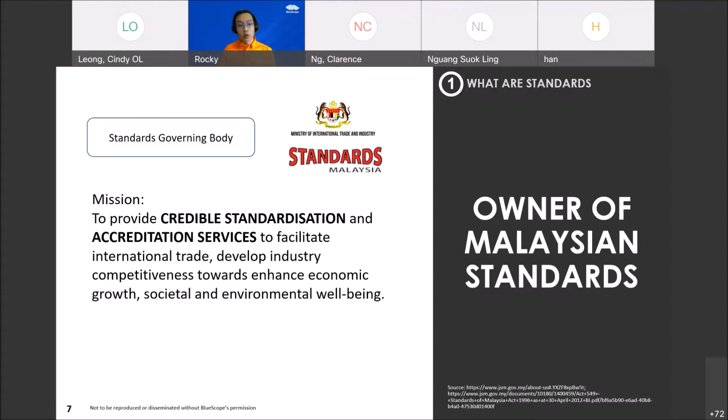So in essence, as the name suggests, it's a standard where everyone speaks the same language, right? Where the products produced across different regions are complying to a known standard. Okay, so as there's the owner of the standards, there will also be users of the standard. So the primary users of the standards will be certification bodies, right? Who use it to certify or even conduct testing.

Okay, so how it affects producers or manufacturers like us is that once we produce the product, we have to have a certain internal guideline ourselves. So it will be very convenient, or for established ones, it will be following or complying at least to the established standards that are recognized. So those products or processes will be certified by an accredited certification body like SIRIM.

And SIRIM would have already been accredited by the government agency or any body within each country to say that they are able to provide such certifications or testing services, right? So they are competent to do so. So those are different levels of how a standard is used. So if it's being accredited, then it's being accredited to a different type of services as well.

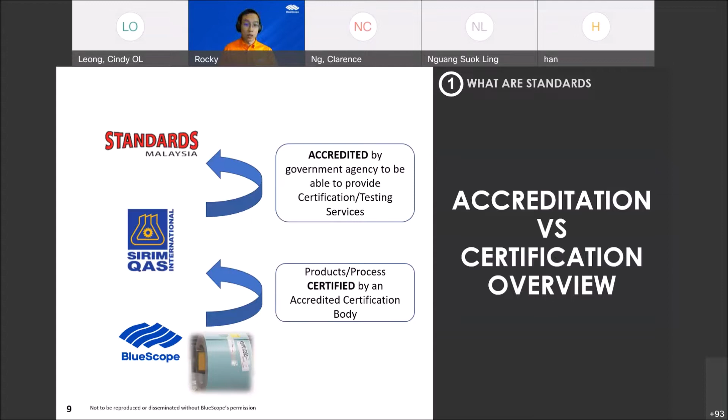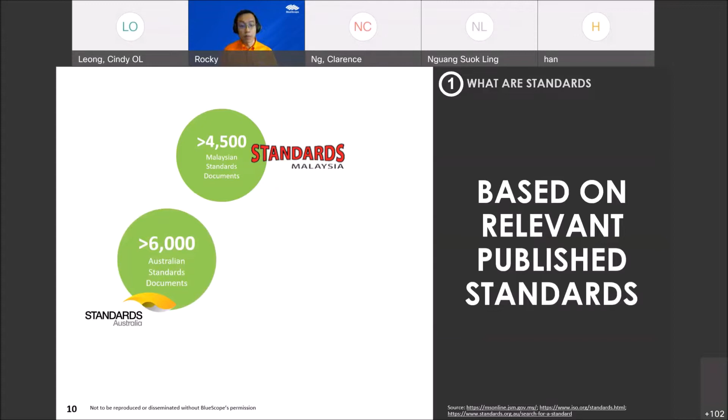Okay, so in Malaysia, as I mentioned, there are Malaysian standards, and statistically based on the website, there are more than 4,500 Malaysian standards. Compared to other countries, for example Australia, they have more than 6,000 Australian standards developed, so it could be covering more scopes. And one of the biggest or most common ones will be ISO, which is an international standard. Based on the stats, they have published more than 22,700 valid standards.

And you might imagine, so many standards, how do you actually catch up with all that? So there are ways where you can actually search for those standards and make sure that you get updated when the standard itself gets revised or gets taken down to be replaced with other standards. So there are subscription services for that.

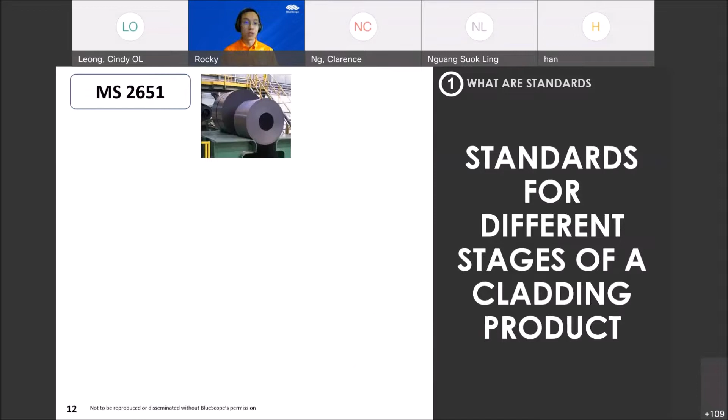Okay, so to be more specific for the steel industry or cladding industry, relevant to us, it starts from the raw material, and the raw material itself needs to be complying or certified to a standard. That standard reference is MS2651. Then when it comes to our production, where we produce a specific type of metallic coated steel, it needs to comply to MS1196. Of course, there are different types of metallic coating out there.

So today I will not be sharing that here, but you can actually find that online. All right, the reference documents will be slightly different from MS1196.

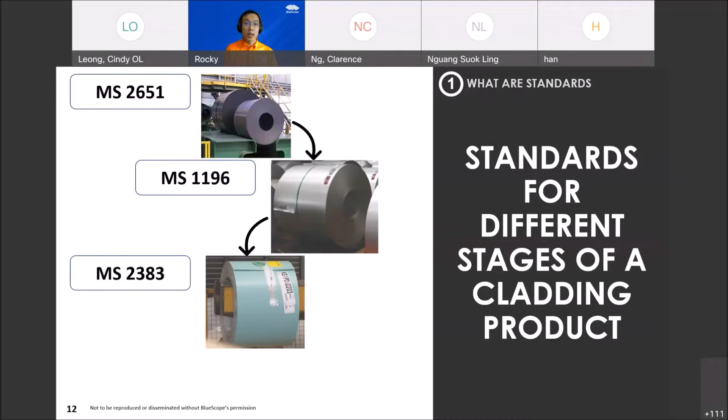So from there, moving on to, let's say, a painted product or pre-painted coated steel, then the reference is MS2383. Of course, in recent years, there is also usage of MS2500, which is a standard that controls the quality of the profile sheets, which today I will not be talking about. So the extensive part will be in the middle, MS1196 and MS2383. Okay.

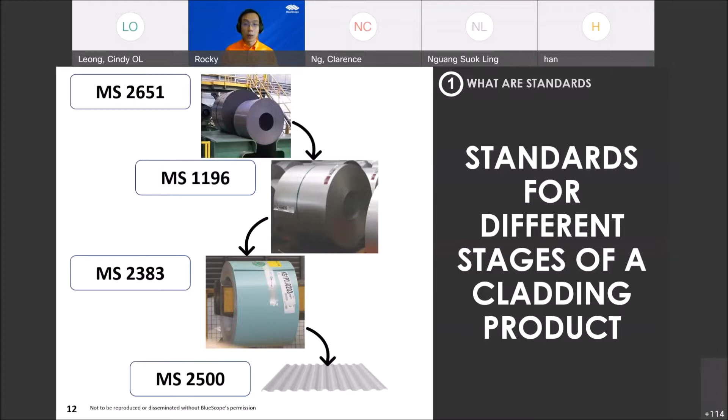So in every single document, normally how we start is by looking at the table of contents. And the first thing that pops up is the scope of each standard. It's really important for you to understand the scope, because sometimes the scope itself will tell you a lot about whether you should proceed with reading all the other details, because most often the title itself cannot explain everything. So you need to go down in detail, for example, MS2383, to look at how this standard will be used.

So over here, MS2383, for example, is used to specify the performance requirements of what they call continuously organic coated or laminated flat steel. That is a very technical term for painted or pre-painted product. And it also specifies it's for construction or finishing of buildings usage. And of course, there are other notes which I will highlight later on.

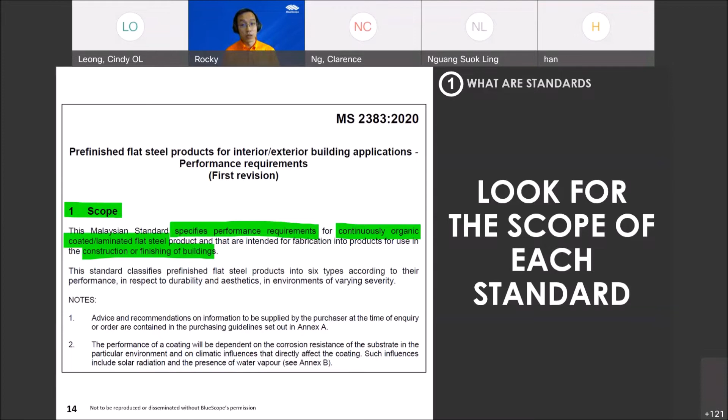So how is it important? That is basically what a standard is for: for producers to produce according to that standard, and also for accredited bodies to certify those producers, and essentially have the same language, so that people can recognize it.

And most often, I'm sure some of you in the audience might have asked for a SIRIM cert. So that is what a SIRIM cert entails. For SIRIM certs, you need to be more specific sometimes in terms of what kind of product you are asking for the SIRIM cert for, and you need to specify the product brand, perhaps, because most often the certificate itself also covers what brand is being certified.

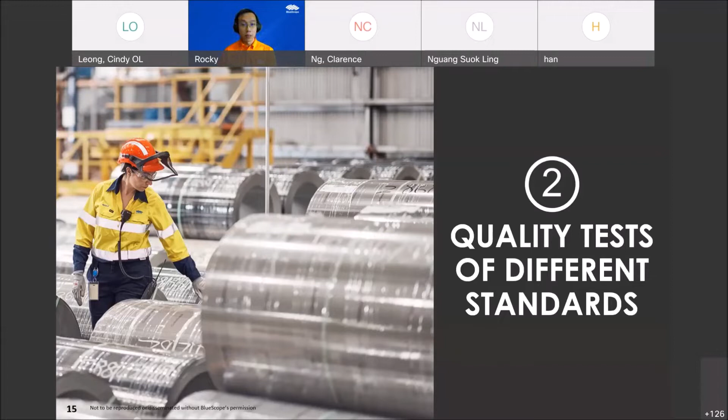Okay, so moving on to the second part, which is about the quality tests of different standards. Under the standards, most often there are testing standards, but there are also standards that specify the requirements when you do production. So that is what quality tests are for. Under these standards, of course, when we say metallic coated steel, just now I mentioned MS1196.

Of course, there are other national standards that are also published and being used as well, because in Malaysia we have producers that might be based in other countries or producing from other countries, and they import. So the way to look at it is that each producer will follow perhaps their national standards when they produce. But if they import into Malaysia, it needs to follow the import regulations. So the different government agencies will specify what standard you need to certify your product to before you can import it into Malaysia.

So most commonly, most intuitively, the Malaysian standard will definitely be used. But of course, some other products might not have a dedicated Malaysian standard. That's why for some products they might take the Japanese standard, the Australian standard, for example, or the American standard. So these are the list of standards that I will be briefly talking about.

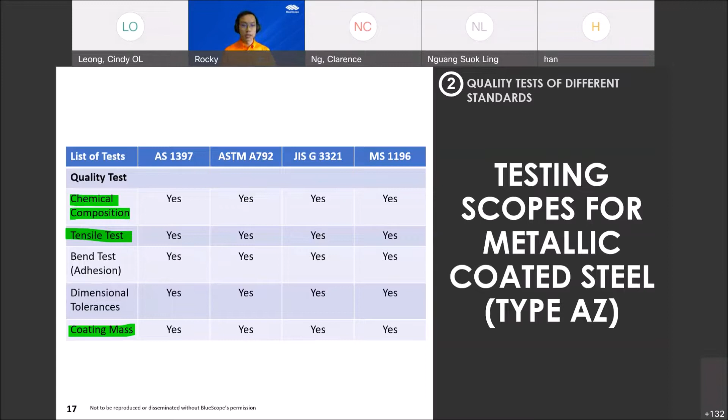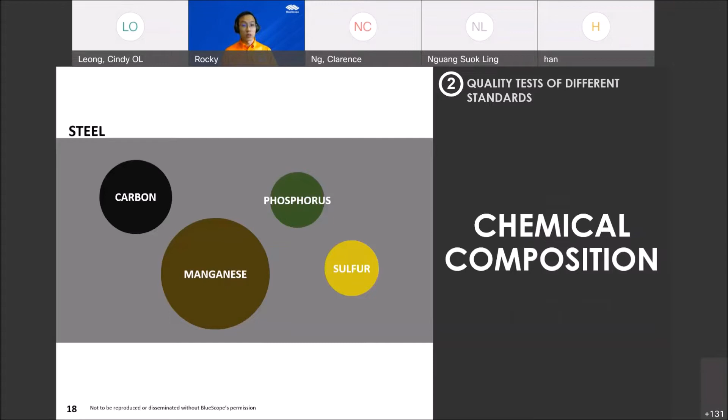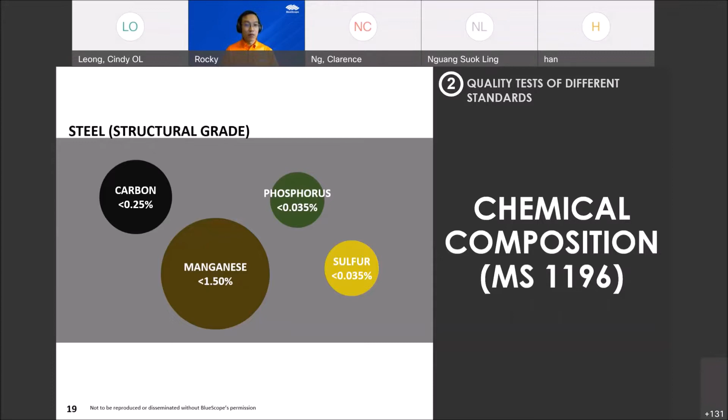Chemical composition talks about the steel base: what is the composition of carbon, manganese, phosphorus, and also sulfur in that steel? And of course in MS1196, the percentage cannot exceed the numbers showing on the screen. But if you compare across different national standards like American standards, Australian standards, and Japanese standards, the maximum allowable chemical composition for these four components is different.

Okay, so how it affects you is that it depends on the steel that you source from, right? If, let's say, the steel producer is not aware of this and produces something with a chemical composition that exceeds some of these numbers, then it will not be complying to this standard, right? Of course, this chemical composition will have its own background story why it's set that way, because it will determine a lot of the mechanical properties or material properties of the steel itself.

So I won't go into the reason why, okay? But just bear in mind, the first thing of the steel base is that the chemical composition itself needs to comply to all these maximum limits. All right. So the next one is about tensile test. Tensile test tests for what is the strength of this steel when it's used for, say, cladding. In the market there are actually various different grades of steel that are meant for different applications.

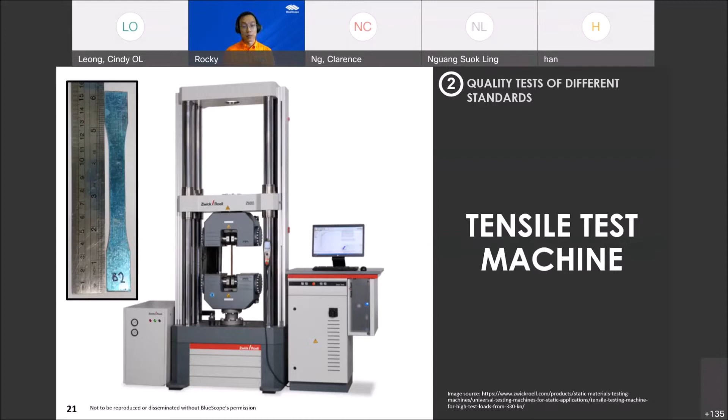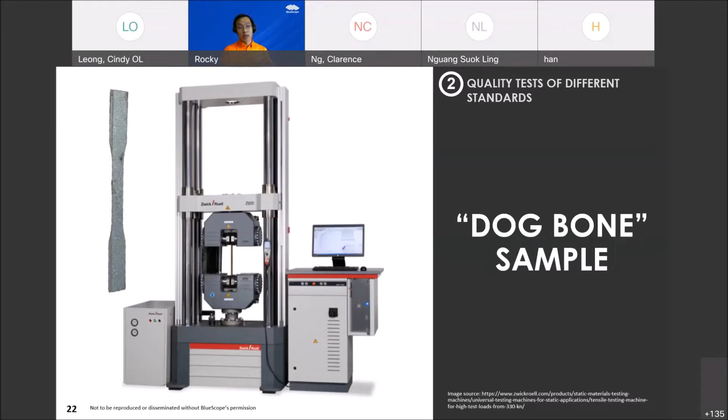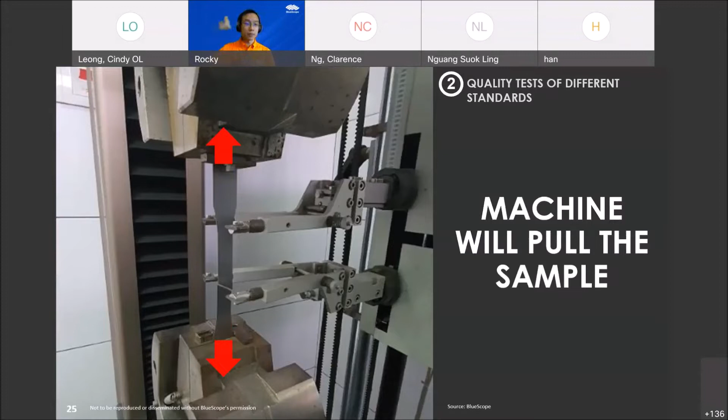Of course, in the manufacturer, even in our factory itself, we have a dedicated tensile test machine. This is how it looks like. Every production will actually take a sample. The sample itself is what we call a dog bone sample, and this is how it looks like. This one is taken from every batch of production, and we fit it into the center of this machine. Here is a close-up. Just place it into the machine so it clamps from top and bottom, and the machine will start pulling the sample until it snaps. In this close-up, you can see there's a clear detachment when it snaps, when it fails.

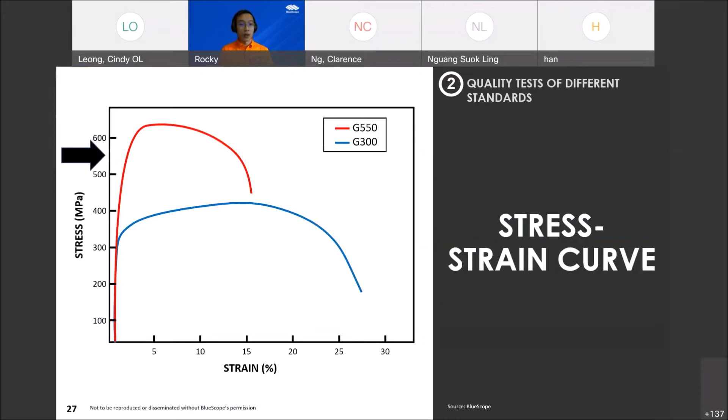From here, the machine, which is connected to a computer, will compute what we call a stress-strain curve. This stress-strain curve tells us the mechanical property of the sample, or of the particular batch of product. And of course, this is all specified in the standards: how high a stress it can withstand. Just to show you, these are two different examples, but I'm using the high tensile one, called G550 steel grade, which is very common in the Malaysian industry for external cladding.

Different standards have different requirements. If you look here, the yield strength will be more or less there, but you can see some minimums are slightly higher, for example JIS at 560 megapascal, while the rest is 550. When it comes to tensile strength, the Australian standard only requires 550 megapascal. For elongation, most of them do not require it for this steel grade, probably because it's really high tensile, so it's not flexible, or ductile, enough. That's why there are no specific requirements for this steel grade.

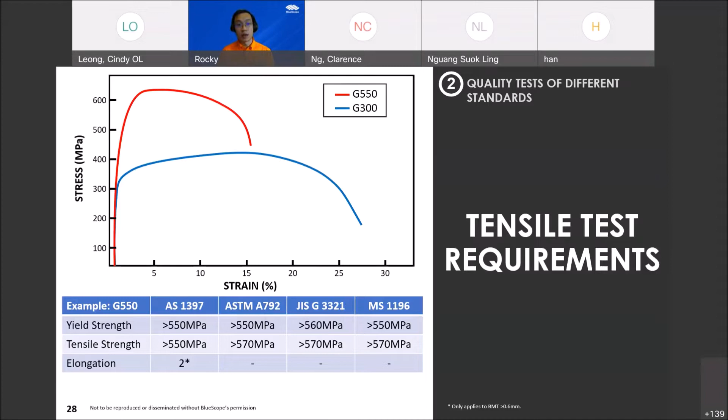Okay, so that is tensile test. This again is specified in different standards, but like what you see here, the minimum tensile requirements will differ. Moving on to the third one, which is the coating mass test. This is the one most often misunderstood, because when people ask for certain tests and I ask further, the answer is, I just want some assurance that this product is of quality. When they say quality, the term can be very subjective. Let me show you why.

Before that, let me explain how the coating mass test is conducted in the factory, as also specified in the standards. Most standards approach this in this manner. You have a full width coil; you saw the sample came from the left-hand side. From this full width coil, which will normally be roll formed, three samples are taken from each side and the center. This is what we call triple spots. Those samples can be in this form or in rectangle form.

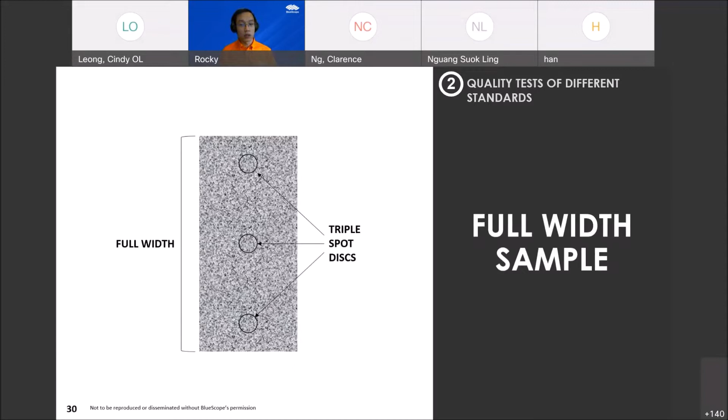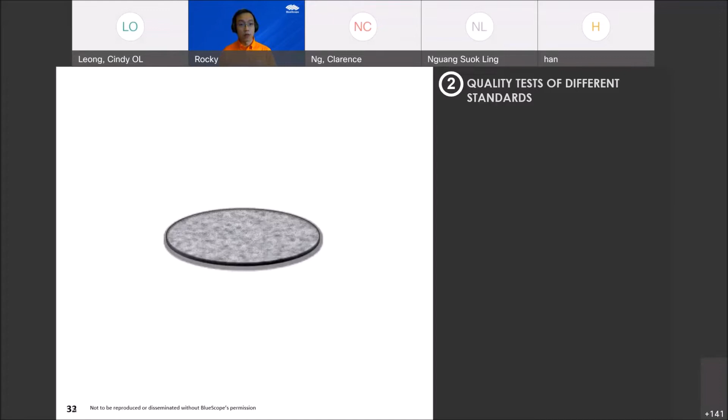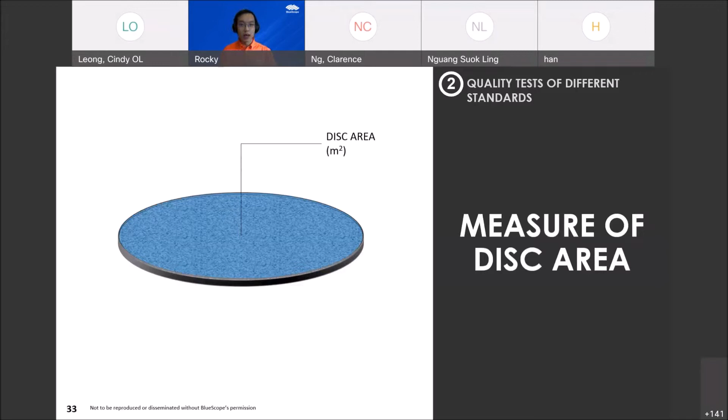Typically, the circle form is much easier, because you can calculate the area of the sample. What you can see here is we normally measure the disc area, which gives you the area of the disc. From there, we remove the coating on both sides.

And from there, we measure the weight of the one sample, which is with all the metallic coating removed. Then we take that weight difference, which represents the weight of the coating, divided by the area. So that gives us the coating mass in grams per meter square. Of course, grams per meter square are defined under AZ, the number behind it.

I normally would use A4 paper as an example. A4 paper packaging won't tell you the thickness, because paper is compressible, and most of the time it's so thin that if you measure one point and another point, it will vary quite a lot compared to the thickness. So the same approach is applied to our industry, where the coating is not measured by thickness. It's measured by coating mass, in gram per meter square, or GSM.

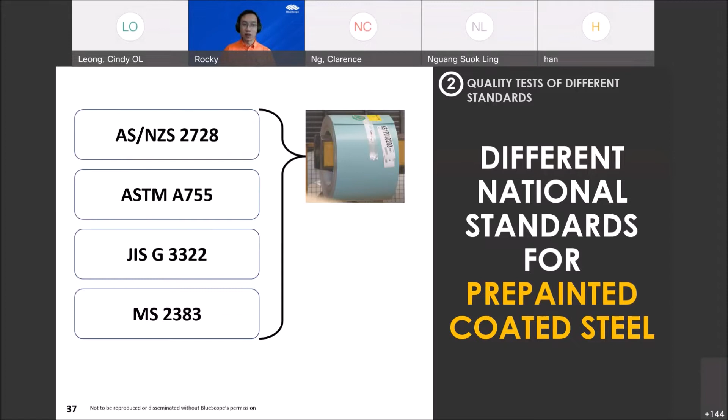Of course, that is just for metallic coated steel. When it comes to pre-painted coated steel, there is a whole range of national standards. I mentioned quite a lot of standards, so you need that specific reference. Earlier I mentioned MS2383 for pre-painted coated steel products in Malaysia. American standards, Australian standards, these are the references. Of course each has its own quality tests, which I will not bore you with because they are quite straightforward.

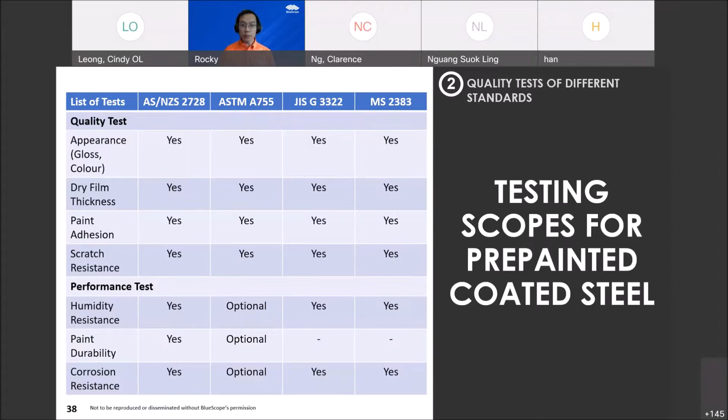But what you need to know is the spec, what is the dry film thickness and so on. These are the quality tests normally done in the factory on every single batch. But what is not normally done is what we call performance tests. This is something I want to touch much more on, because I think there is a lot of misunderstanding on the performance test front. So let's get into the performance tests of different standards.

The first one I would like to highlight, humidity resistance, is quite straightforward, with only one testing hour, which is 500 hours. So there's no difference there, and the requirement itself is quite low. The second one, the paint durability test, is most often overlooked in other standards. So that's why I would like to touch on the paint durability test as well as the corrosion resistance test today.

Right, so as you can see from this list of different standards, it seems like only the Australian standard is the one that requires a paint durability test, whereas for the Japanese and also Malaysian standards, it doesn't seem like it is the case. So again, the scope is that the test itself should determine how durable the paint is, right?

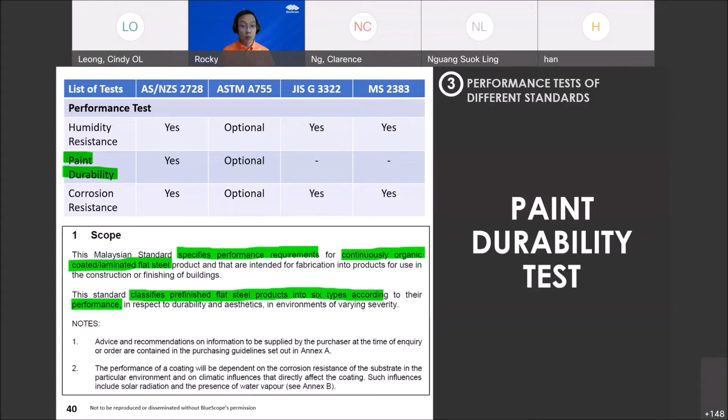So the intention is that you do not want the paint to last just like 2 years, 3 years, because once it's installed onto a building, the likely chance of you not wanting to replace it is very high, because you don't want any downtime if, let's say, it's a production floor, or you don't want to incur more cost to the building, right? To so-called replace it or to fix it.

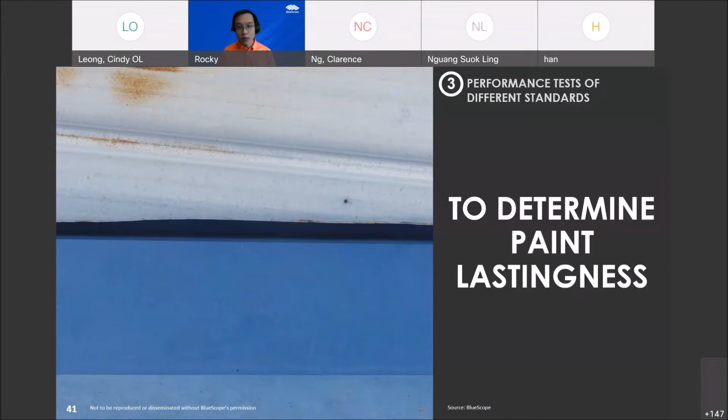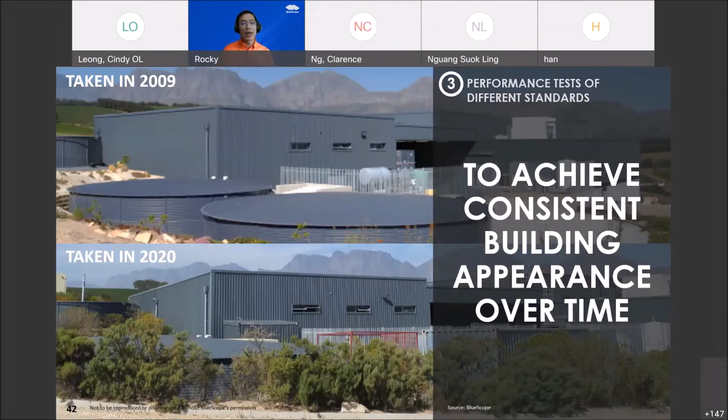Okay, so what you ideally would want is consistency of the building appearance over time, right? The keyword here is over what period of time, right? So that requires a much more realistic testing, right? So how paint wears off is actually quite straightforward.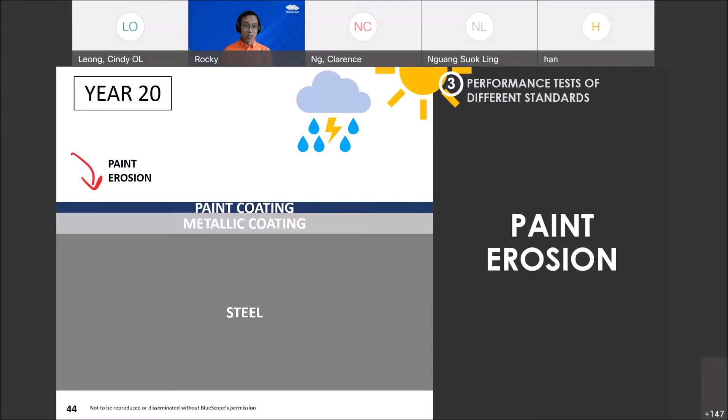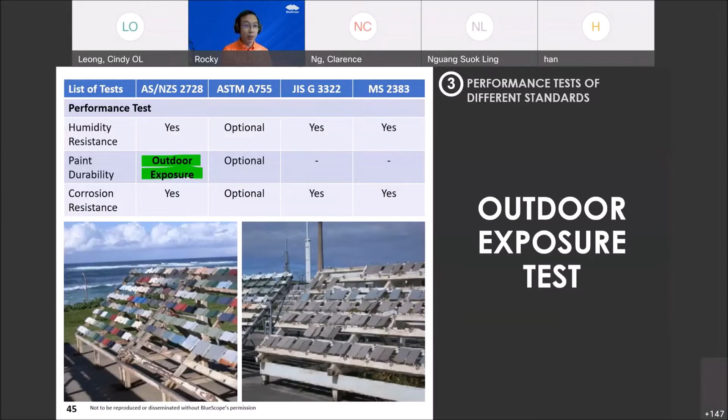Okay, so of course there are tests that are done in the lab, but again, when it comes to lab tests, right, there is actually a very small chance that it can be replicated as real as it is in the actual weather. So normally in the Australian standards, they would require the product to be tested in outdoor exposure, right? One of the reasons why is because if you recreate it in the lab, the likely chance of you recreating only one environment is very high.

But if you look at the entire world, right, different parts of the world would have different UV irradiation intensity, meaning in different parts of the world, if you use the same product, it would actually wear off very, very differently. The color would appear very differently if you put it back together after maybe X amount of years, like 5 years. The color in a location with much higher UV irradiation intensity will have changed much more compared to a location with low UV irradiation intensity, right?

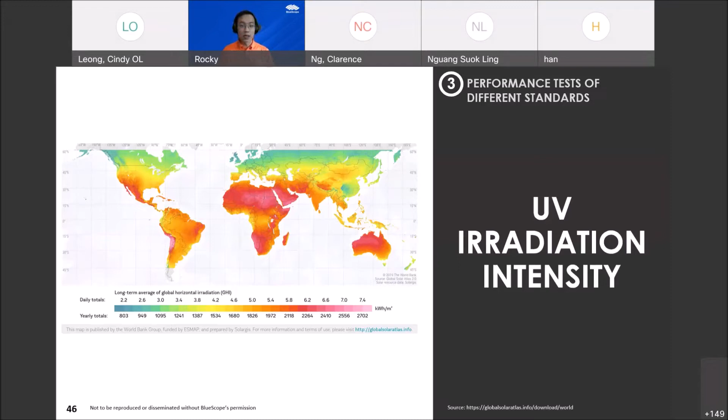For example, like in Russia or in Canada, where most of the year is quite gloomy, it's not very sunny, compared to places like South Africa, or even, as you see here, one of the reddest, Australia. Okay, so having said that, under the Australian standards, they actually have specified where the severe UV sites are. And of course, not just in Australia, but in Malaysia we also set up an exposure site, because there are different levels of UV irradiation intensity, like I mentioned. So it would react differently in different parts of the world.

So that is data that you have to get from different suppliers to make sure that the same specific specs, and also ideally the same color, would be able to perform in such an environment. Okay, so of course the data will be collected, ideally yearly, or otherwise depending on the duration that you're asking about or interested to know.

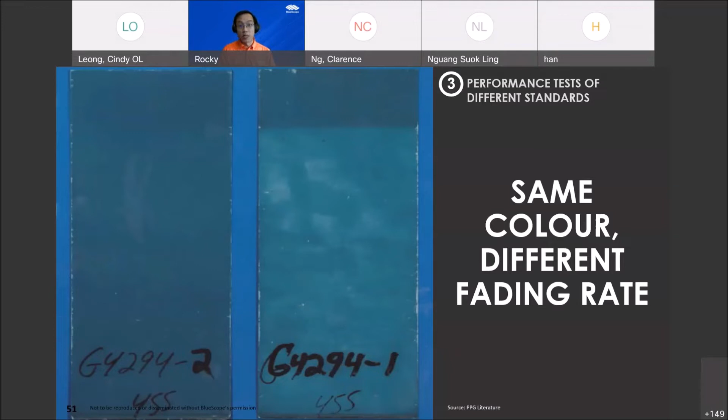Okay, so some of the results, as you can see here, is we would expose two different specs that appear the same color, right? But they end up having a different fading rate, right? This is something that we aim to do, even though it appears the same at the beginning. If there's no such test, then you would not learn how the paint formula affects the durability.

So the key components that affect it will be the type of resin and also the type of pigment selected for each color. And please note that even though you ask for the same color from different suppliers, cost could be one of the factors for you to make a decision. But bear in mind, there's another side of it, which is the performance.

So bear in mind to ask for outdoor exposure test results if they have those results, and make sure that you ask for more details, like whether it's the same resin, same type of pigment, and so on, right? So those are things that you need to ask. It's not applied across the board, because there are so many colors out there. There are so many different types of resins and pigments out there. So the best way is to get assurance, right?

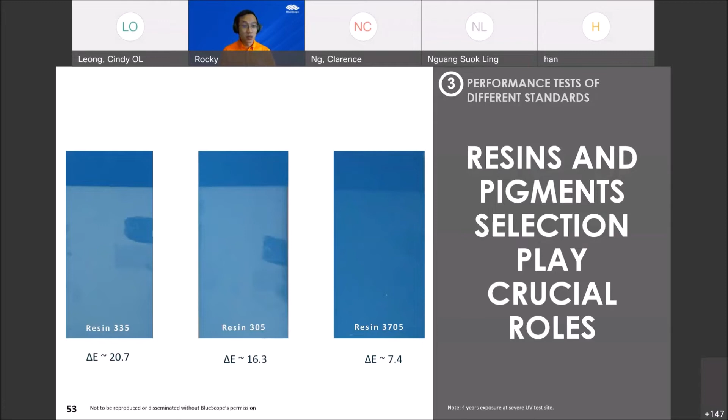And that is quite straightforward, because the paint durability test is just done by the Australian standards. There are no other standards doing it more conclusively, more thoroughly. But when it comes to corrosion resistance, there are actually different tests that are established, and this part is where most of the confusion comes in. I'm sure you have heard many different versions. There's no wrong version of it, but it's just how it is presented to you, and whether you have seen all sides of the story or not. So let me present what we have learned about this salt spray test and cyclic corrosion.

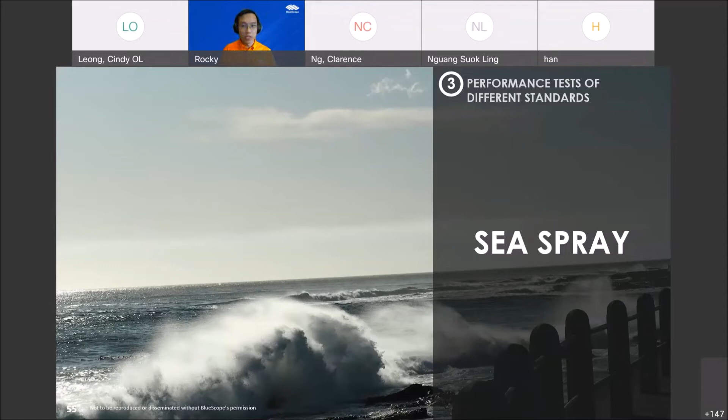All right, so SST and CCT essentially mean salt spray and cyclic corrosion, but later on I'll have it in writing. So coastal areas like in Malaysia or in South Africa or in Australia, or any part of the world where there's sea, there's always what you call sea spray or salt spray, where the sea breeze brings up a certain level of salt particles, and that creates an environment that is more corrosive, right? Of course, there are other factors like industrial emissions and whatnot.

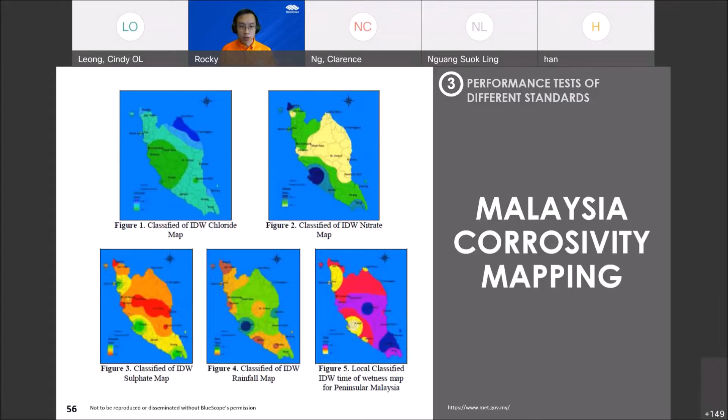Historically you can look at your country's meteorological data. So this is one that was done in Malaysia, but it was just a graphical thing. There was not really a lot of data that can be derived from it, and from those graphics, the research paper derived it into this, where they actually classify different locations by different corrosivity. And what you can see from here is that they actually neglect the coastline, and it seems like it's measuring mainly the industrial emissions.

And if I look at other countries' corrosivity mapping, like Australia, they actually map it including the coastline factor, just like I mentioned, sea spray, salt spray. So in certain parts you can see the red border is thinner, which represents 1 km away from the coastline. And something like this could represent 10 km away from the coastline, right? And the difference here is that if the same product is placed within the red border or away from the red border, the lifespan will be very different.

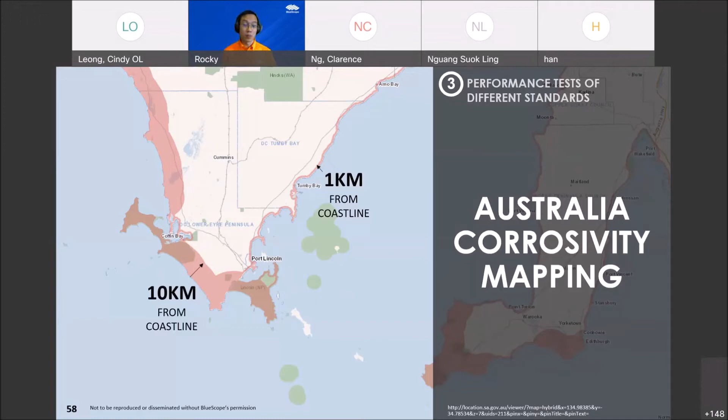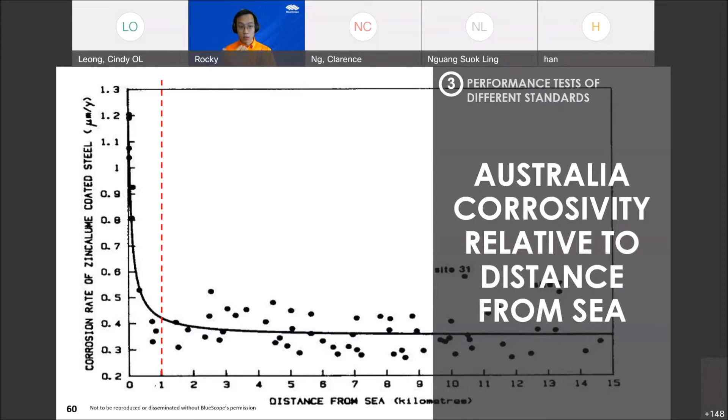Okay, and of course, in the Australian standards, they also list where the testing sites are and what the corrosion classifications are, which I will talk about later on. And intuitively, you can see that here the x-axis represents how far it is from the coastline. So the closer it is to the coastline, the more corrosive it is, right? The further it is, especially after the 1 km mark, the corrosivity of the environment drastically reduces.

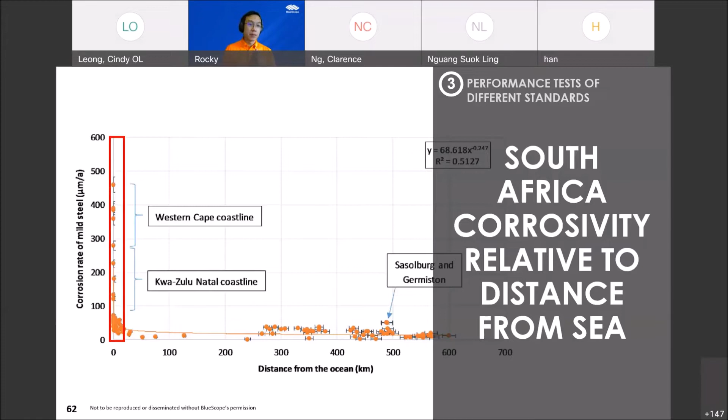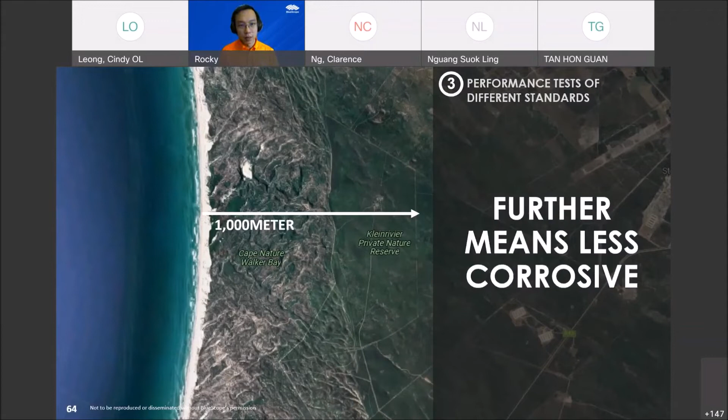So in essence, if your building is, say, 200 meters away from a coastline, compared to it being 1,000 meters away, then the building located 1,000 meters or 1 km away from the coastline will be in a less corrosive environment. All right, so how does this matter, and how does it link to those different standards? Okay, so this is where the confusion comes in. So just as I mentioned, the salt spray test and cyclic corrosion. So salt spray SST means salt spray test.

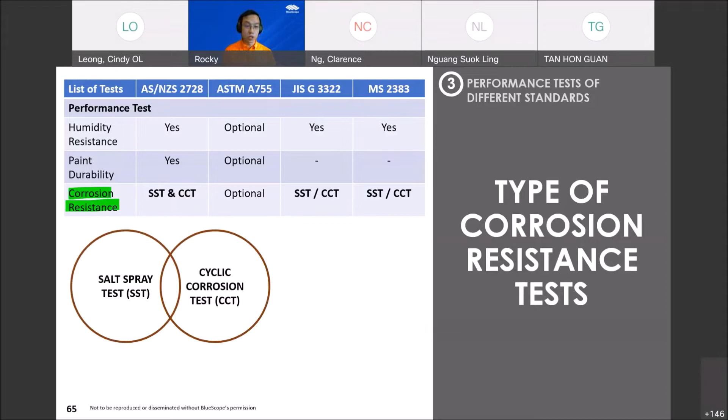So cyclic corrosion has a certain level of similarity to the salt spray test, but there are variations that differentiate it from the salt spray test. And of course, there is also the outdoor exposure test, which without saying is the most realistic one because, again, it's outdoor, right? You just place it there, expose it for years, and then collect data.

So the thing to be debated about is salt spray and cyclic corrosion, because these are what we call essentially simulations, right? So of course, traditionally, the salt spray test, which is a widely used test, was not just done for cladding, it was also done for, say, in this example, a door frames standard. I didn't maximize the standard because it's just an example, but you can definitely find it. It's actually, I think, a British standard.

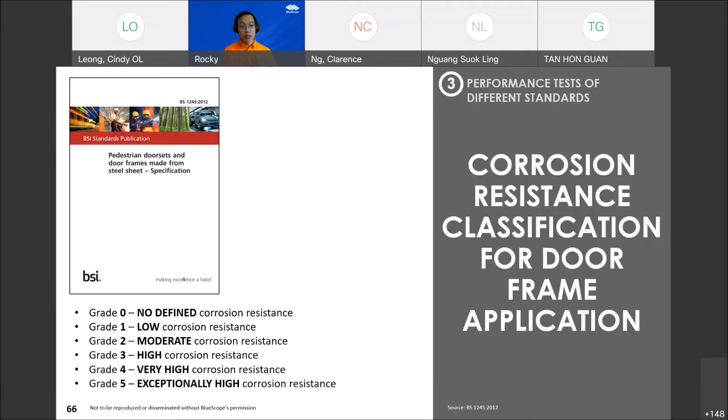So over here you can see the corrosion resistance classification of door frame applications for different types of material. Over here you can see grade 5, and the term is called exceptionally high corrosion resistance, and this is actually a direct quote from the standard itself. Exceptionally high corrosion resistance. And if you use this term and then you look at the salt spray test, the salt spray hours are only 480 hours. Exceptionally high corrosion resistance, right?

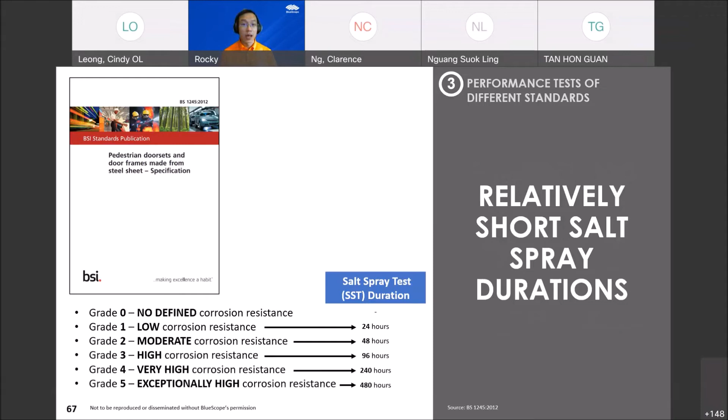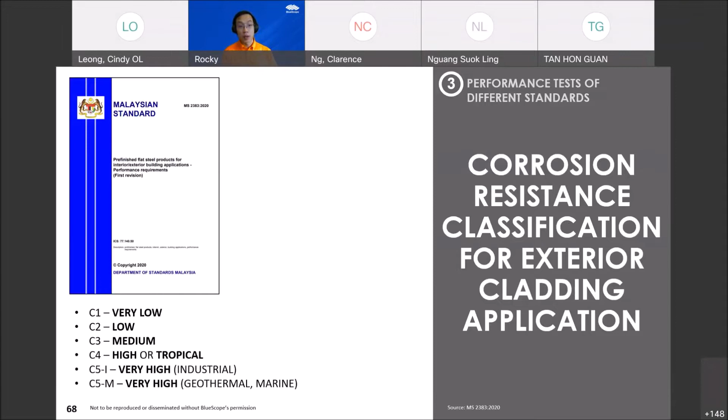And if you look at the external cladding application, the classification is more of a C1 to C5, and at C5 they have -I or -M, which represents industrial or geothermal or marine. Okay, so now I show you the salt spray test duration. So C5, which is very high corrosion resistance, or an environment of high corrosivity, the salt spray hours is 2,000, right? So the simulation is much more severe.

And just now, the so-called exceptionally high corrosion resistance falls only around the C3 category. So that is the level of disparity in terms of classification. But within the standard itself, there are some discrepancies as well. So over here, I'm showing you the salt spray durations and the cyclic corrosion resistance. You can see C3, which is 1,000 hours, as opposed to salt spray of 500 hours. And then C5 originally was 2,000; now cyclic corrosion is 4,000 hours.

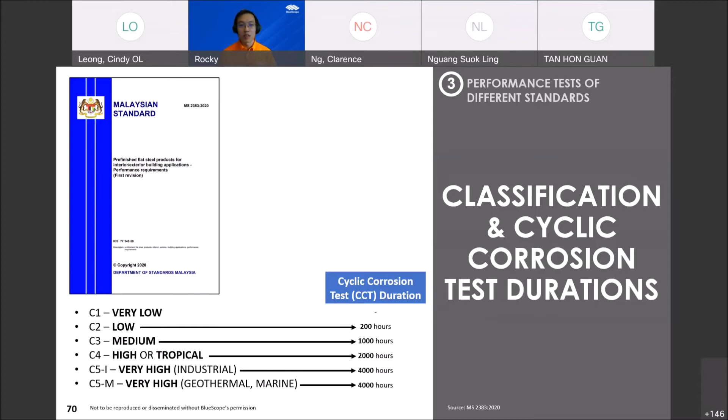So I will explain later on what the differences are between these two tests, what results you can use from these two tests, and of course how realistic it is. That is the final question I think most of you might have in your mind, right? Why are you telling us these different types of tests? So let me just get into it.

So SST, salt spray test, and CCT, cyclic corrosion test, are essentially simulated environment tests. They put the samples, as you can see these blue and orange samples, in the chamber, and there's a spray nozzle which sprays out a certain type of solution to simulate a more corrosive environment. And the way they classify whether the product can last for C2, C3, C4, and so on, is based on the duration of the tests, which I have shown earlier and will also revisit later.

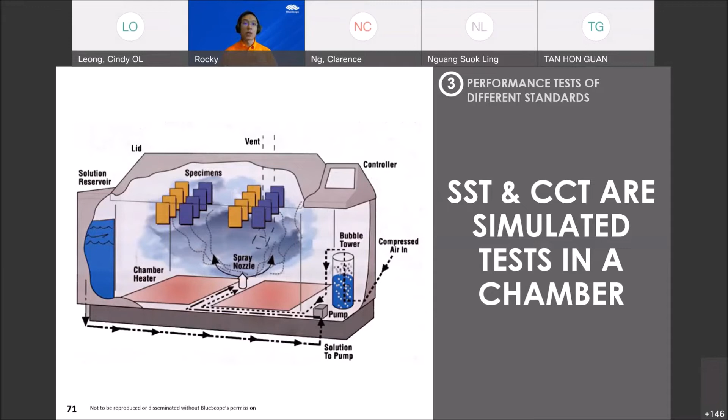All right, so let's talk about the salt spray test first. The salt spray test also has its own standards. There's the American standard, ASTM B117. There's also the international standard, ISO 9227. The Australian standard also has a much more granular one, I think AS2331 dot something. All these point towards the salt spray test, with slight variations. So again, we have to be specific when talking about these test methods. Even in production tests, they specify which test they want to follow.

But generally, and this is super general, this is what the salt spray test condition would be. When the nozzle sprays out the solution, it contains 5% NaCl, which is 5% salt. So the solution sprayed out from the nozzle is a 5% solution. The temperature of the chamber itself will be 35 degrees Celsius. And it will be 250 hours of wetting, meaning the spray would go on for 250 hours.

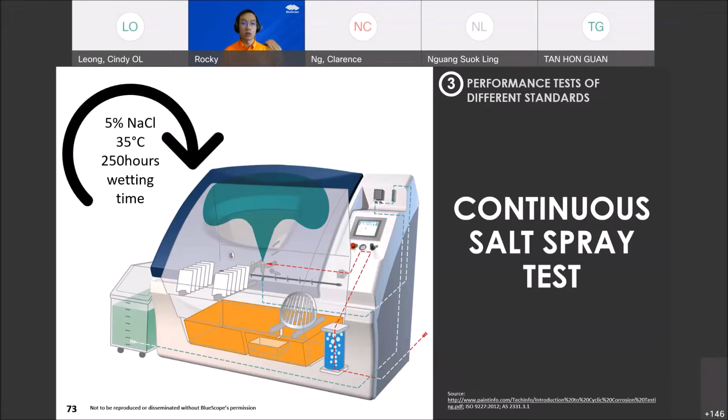And if you want, for example, 1,000 hours or 500 hours or 2,000 hours, they will go on to do that continuously, and you might yield results like this: 500, 1,000, 1,500, and 2,000. So of course it gets more corroded over time. Okay, but it yields the corrosion result.

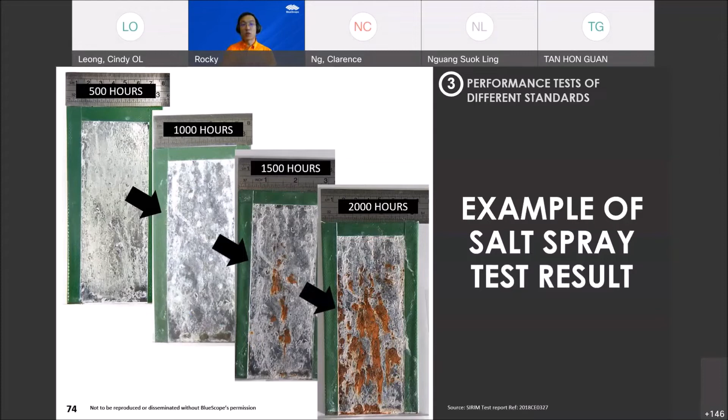But the question now is, is it realistic? Okay, so it yields corrosion, but that does not mean it shows the worst case scenario, because we have actually seen a lot of examples where it does not. So before I go on and show that, let me just tell you: salt spray test has no direct correlation with outdoor exposure test.

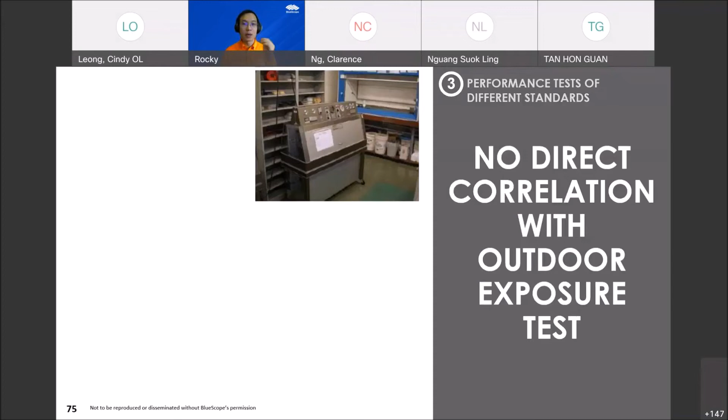And why I say this is because of the test method itself. Take, for example, ASTM B117. It actually mentions the practice provides a controlled corrosive environment, which has been utilized to produce relative corrosion resistance information for specimens of metals and coated metals exposed in a given test chamber. And the prediction of performance in a natural environment has seldom been correlated to salt spray results when used as standalone data.

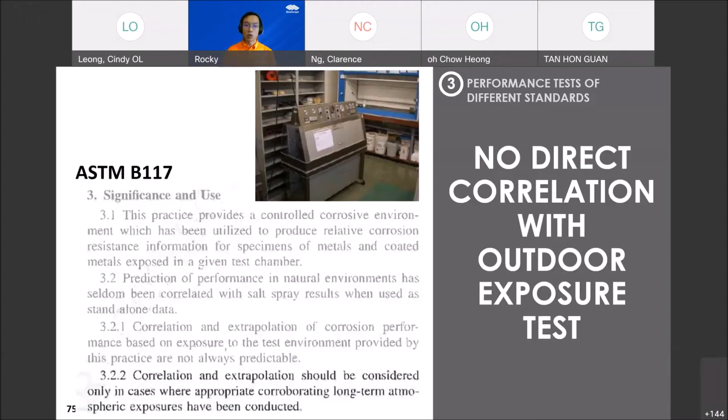Meaning if you use salt spray test results as standalone data, it has seldom yielded a relevant result in the natural environment. And the correlation and extrapolation of corrosion performance based on exposure to the test environment provided by this practice are not always predictable, which later on I'll share some examples. And last, the correlation and extrapolation should only be considered if appropriate corroborating long-term outdoor exposure data has been collected. Meaning, salt spray test by itself should not be taken as a realistic result unless it has a corroborating outdoor exposure test.

And this is not unique. This warning is not unique to the test standard itself, because Australian standards and international standards also put out the same warning for the salt spray test. But this is most often left out when it's discussed, meaning when people show you the salt spray test: this is how it looks, the severity of the corrosion, and it passed. But it has seldom been presented with the outdoor exposure test.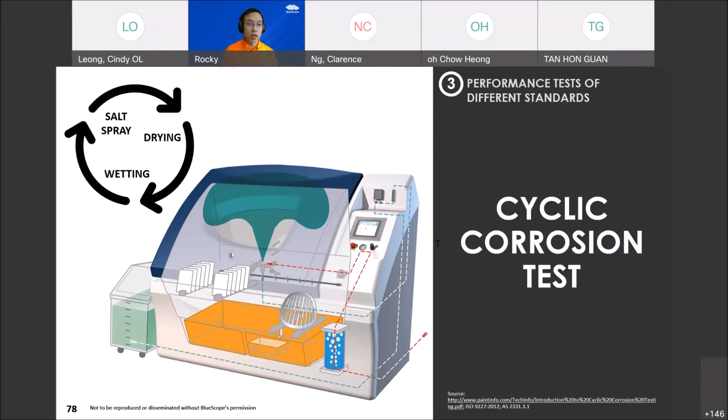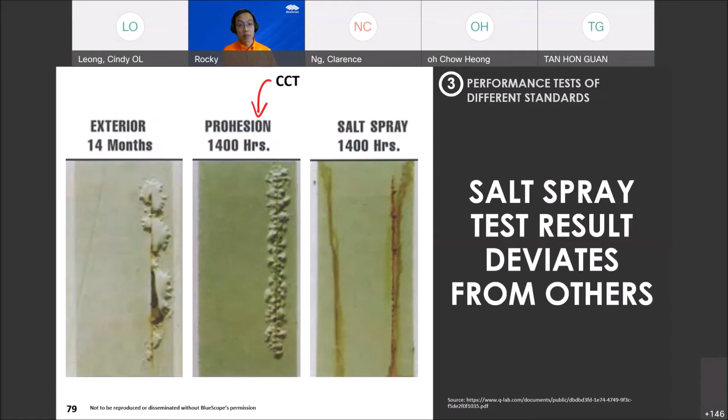So Prohesion, as you can see here, is actually a type of cyclic corrosion test, and exterior means outdoor exposure test. So left is outdoor exposure, Prohesion is cyclic corrosion, and salt spray is on the right. And what you can see here is that the salt spray test seems to show some sign of rust, but it deviates from the results shown in the outdoor exposure of only 14 months. If this is not enough, there's another result where a salt spray test of 600 hours is actually worse compared to outdoor exposure of 4 years, while cyclic corrosion seems not very severe.

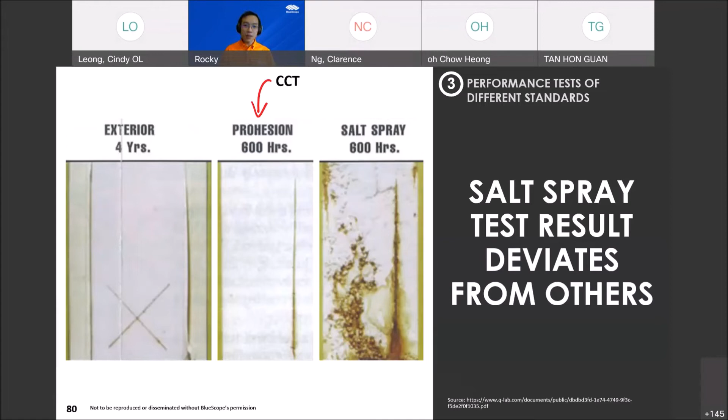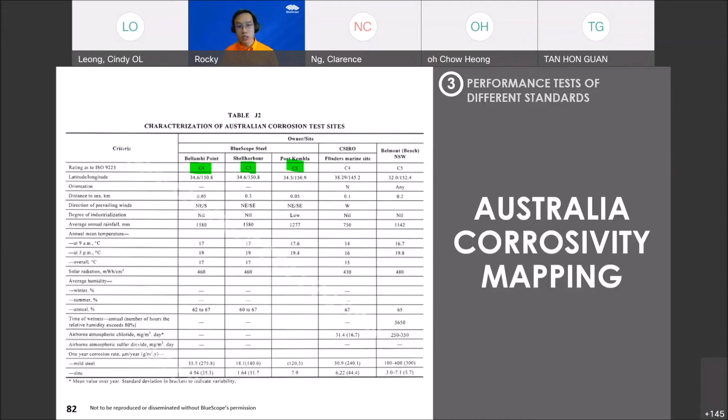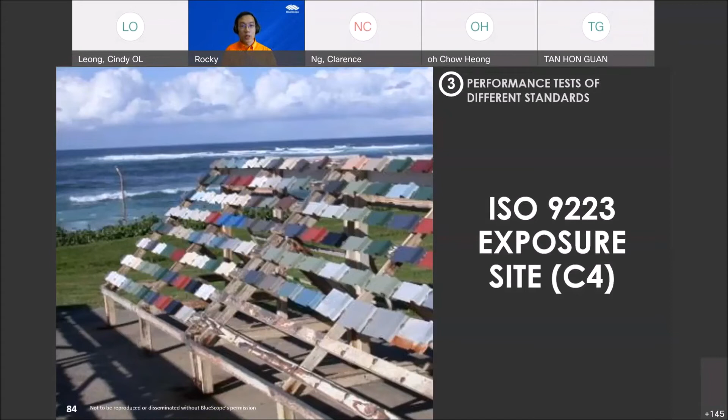For example, these 3 samples are the same product spec, the same product, but they were cut into different parts and placed in different environments. And when it's time to judge, you can see that the product placed in C4 started corroding. So what it means is that it is not suitable to be used for C4 based on the test duration. C3, C2 might still be possible.

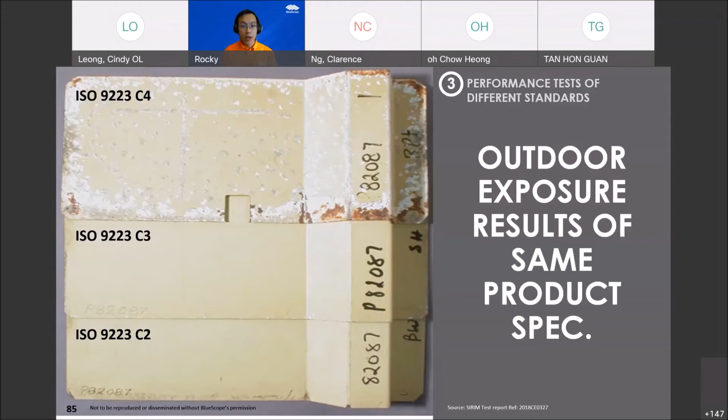All right, so we have also conducted so much testing, and we also compared with cyclic corrosion and salt spray test, and these are specific products used for cladding. The earlier one could be used for marine and so on, but this specific example is used for cladding. The top is the outdoor exposure test. And the bottom, I'll give maybe 5 seconds for you to guess which one is salt spray test and which one is cyclic corrosion. Based on what we learned just now, you might have a hint already that the left side is cyclic corrosion and the right side is salt spray test.

So this shows that quite often a salt spray test shows a much more severe result. And the intention here is not to look at the worst result out of the simulated tests, but rather which one is more realistic to the actual. And this is another one where the salt spray test again seems to yield a worse result, but in cyclic corrosion and outdoor, it doesn't seem like the case.

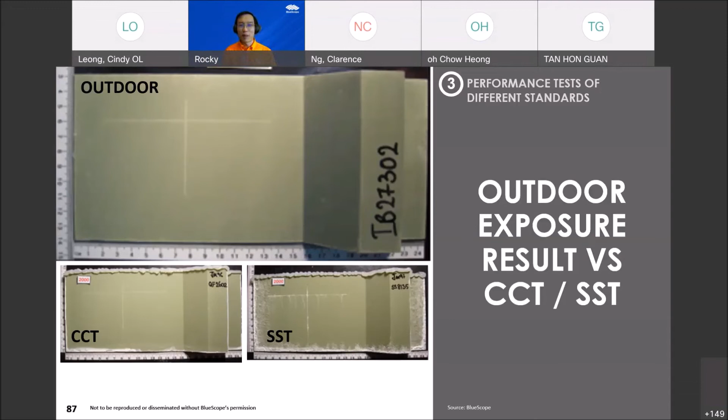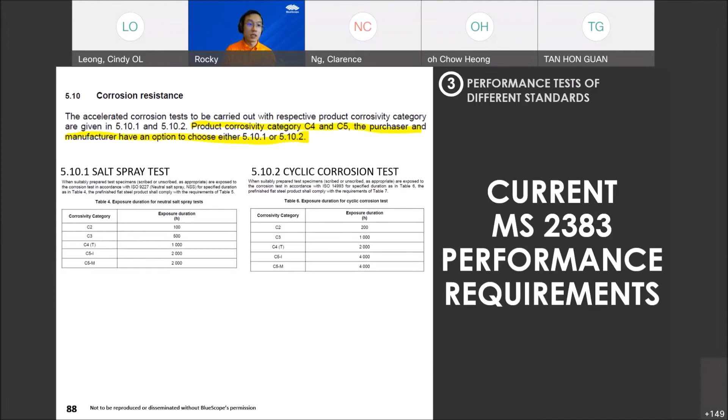Okay, so after going through such a big round, coming back to the standards, the reason I shared all that is because in the revised MS2383 standard, the latest 2020 version, they have included salt spray test and cyclic corrosion in the tests. But for a product to be classified under C4 or C5, the manufacturer can choose to conduct either salt spray test or cyclic corrosion test. This is where the danger happens, where the confusion happens.

So I made a table for you to have a better picture. If the product is to be classified as C2 and C3, it can be tested with the salt spray test alone, because the environment itself is not as corrosive. Most often the salt spray test will give corroborating data with the outdoor exposure, but not always, mind you, because there are specs out there that are not even suitable but might pass this salt spray test, based on what we saw.

But when it comes to cyclic corrosion, you can see different hours: C4 being 1000 hours of salt spray, and C4 for cyclic corrosion is 2000 hours, which is double the hours. Double the hours doesn't mean the salt spray duration is higher. It means it has 1000 salt spray hours, and the rest is a mix of dry and wet cycles, depending on the type of cycle. That is the ratio: 1000 hours salt spray and 1000 hours of drying and wetting.

And most often when testers like SIRIM conduct all these tests, just to put it in context, they charge by the hour, how many hours you utilize the machine. For example, for 1 hour they could charge 10 ringgit. Then for the salt spray test, it will be 10,000 ringgit for 1,000 hours. Same thing, they would also charge 10 ringgit per cyclic corrosion hour, so that would be 20,000.

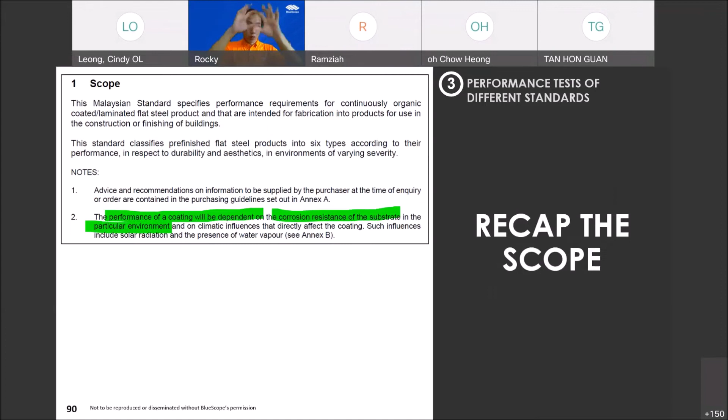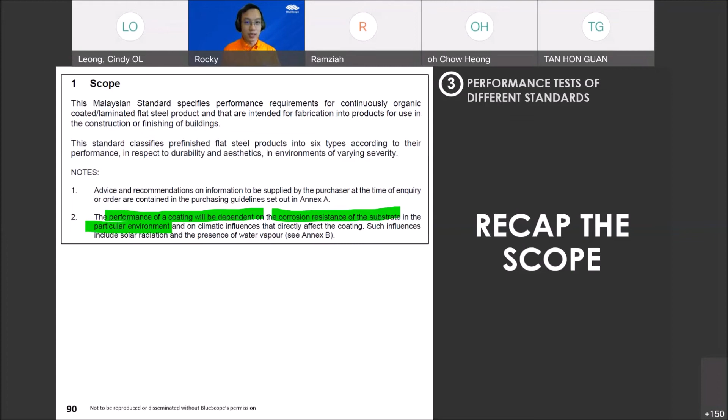The performance of the coating will be dependent on the corrosion resistance of the substrate in the particular environment. So here, let me just show you the difference of the same substrate that is tested in salt spray test as is tested in cyclic corrosion in the same product category, which is C4. Same specs, yeah. One that is tested in salt spray, C4 is 1000 hours. But if you test it in cyclic corrosion, it will be 2000 hours.

And this is how it looks like. And you might pause and want to recap what I just mentioned earlier. What I've shown you earlier, that cyclic corrosion had proven consistently that it will show closer results to the actual outcome compared to salt spray. But there's a dilemma again about payment of the tests. People are incentivized to pay less for the same classification.

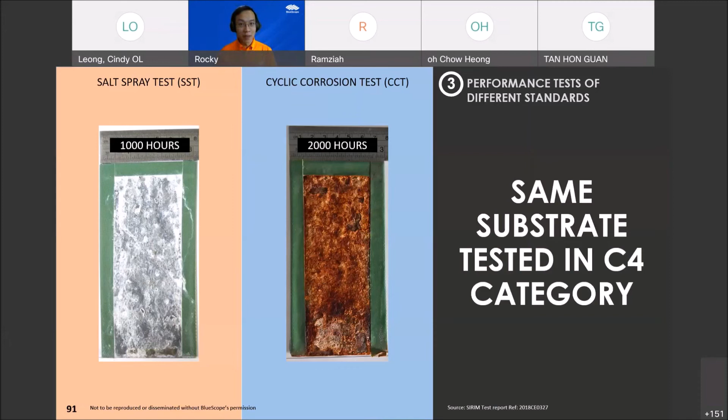So at this juncture, the certificate itself will not mention whether it's tested in salt spray test or cyclic corrosion for C4 category. So it is for you as a consumer, as a specifier, to ask for all this information, right? So that is why the reason of this platform is to let you be aware of the information, so that you know the information now, so you can ask for the right so-called requirements.

Okay, so I'll leave you to this final note that I thought about: when a product A that's certified to the same standard, would it perform similarly to product B that's certified to the same standard under the same product category? So of course, I'm not gonna force you to have the same answer, but my answer would be, I need to look at the result. I need to look at the salt spray test, the cyclic corrosion, ideally, if possible, the outdoor exposure tests. That is my conclusion, right?

And of course, I hope you have the same learning as me when I prepared for this topic. And just to summarize what I've covered today, which you can revisit through our YouTube channel, is that for a standard, you need to look at the scope, right? What is the scope of this standard? Whether it be testing, product production related, or inspection related, like ISO 9001, which is for a quality system, right? So that is where you can identify the standard usage in the scope. Normally, it will be at the very beginning.

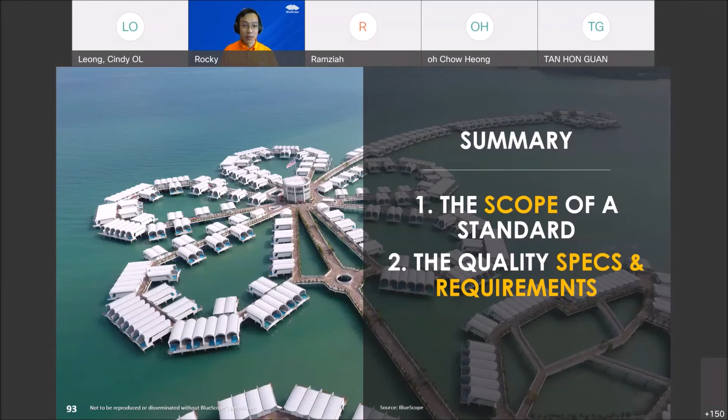Then the second point that I've covered is that, for production standards, there is a part about quality specs and requirements. So you need to ask for the specs as well, not just looking at the product certification, because like I mentioned, the same certificate might cover product of the lower end and product of the higher end, right? So of course, this really is depending on your supplier. So you need to be asking all these questions in order to get the answer, right?

So again, last would be the more realistic performance tests, which are all covered in the standards. But you need to know which test yields much more consistent, realistic results, based on whatever I presented. So for me, I would definitely look at outdoor exposure tests, which we have seen a lot based on our industry and our Malaysian market. There are a lot to be studied about different buildings around Malaysia, and around the world as well. So those are data that the supplier should be ready to furnish you with, and not just salt spray tests.